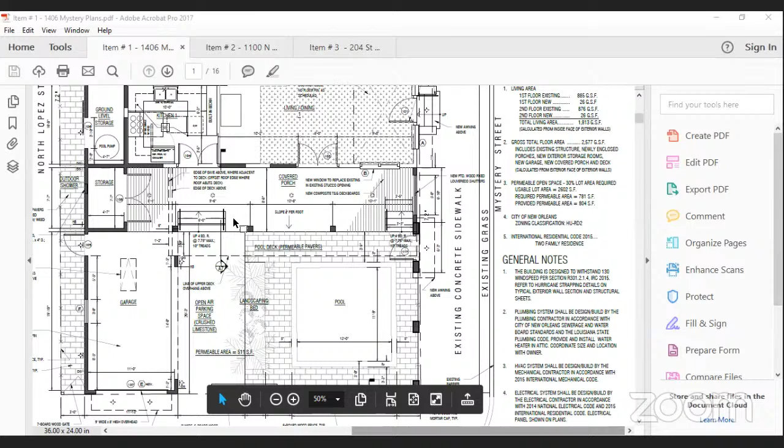Catherine, do you want to just take it away and let me know if you need a different page of this or a different spot? I'm on page 1. Okay, it's very simple, the drawings speak for themselves.

There's an awning over the garage door on Maurepas Street. And then there's an awning over the gate entry into the exterior space on Mystery Street, and also an awning over the front door, which is already there. There's already a stoop there, and we're adding an awning to match the other awning. So there's a total of 3 awnings onto public property. The stoops are already existing on Mystery Street, and one of them is just adding an awning over it.

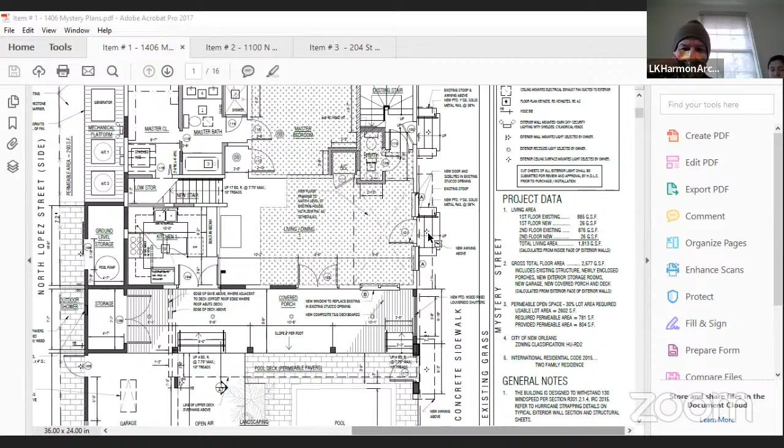You could see them in elevation, on page 2. Yes, on the next sheet. Okay, so one quick question that I had, and again I apologize, Ashley Givens isn't here and normally she'd be sort of on top of this, but with the holiday and people being in and out, I'm just trying to understand the dimensions of the awnings. Because they're different dimensions in terms of the distance from the property line, and that's shown here on page 2, right?

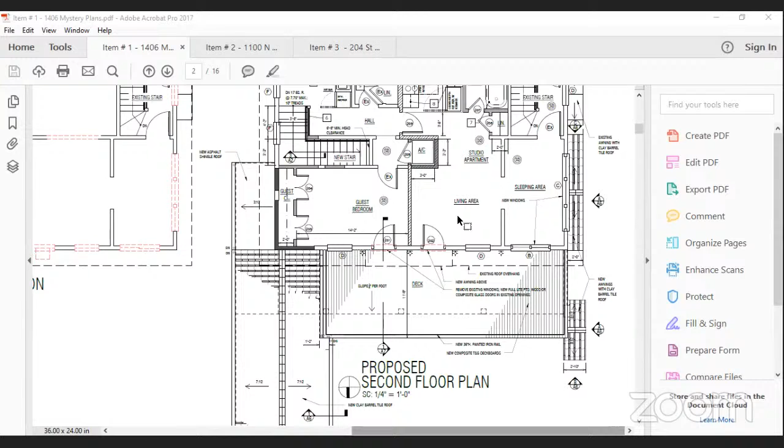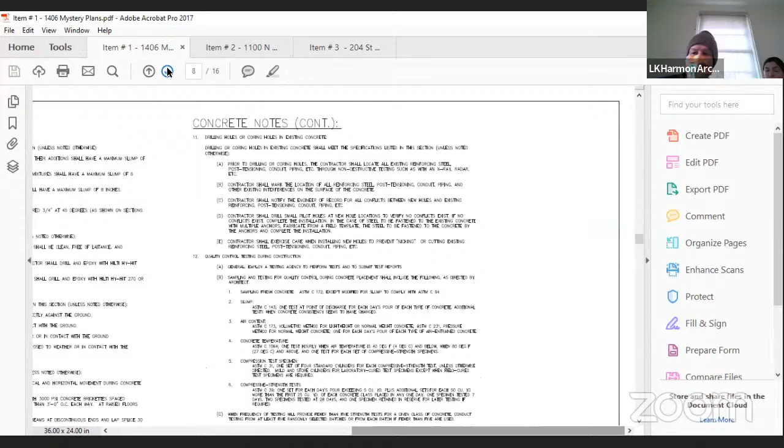Well, if you go to sheet A4, you can see the aesthetics of them better, but the dimensions would be on the roof plan and on the floor plans. But okay, that's the structural you're in right now. But we're going to tell you what the dimensions are, right here in the drawings.

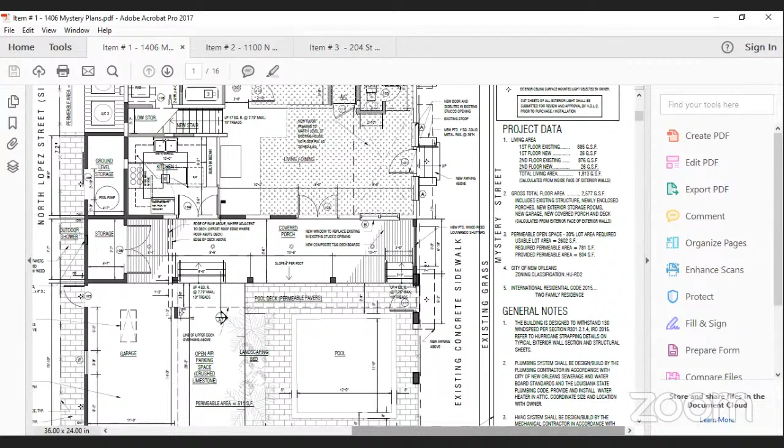It looked like one was, I guess there were 2 measurements on page 1. One of them is the one on the garage, which is facing Maurepas, is 2'2" by approximately 9 feet wide, and it's the terracotta tile. And then the 2 that are on Mystery Street, one of which is over a gate and one of which is over the front door. The one over the gate is 2'10" by approximately 6 feet wide, and it is also the terracotta tile.

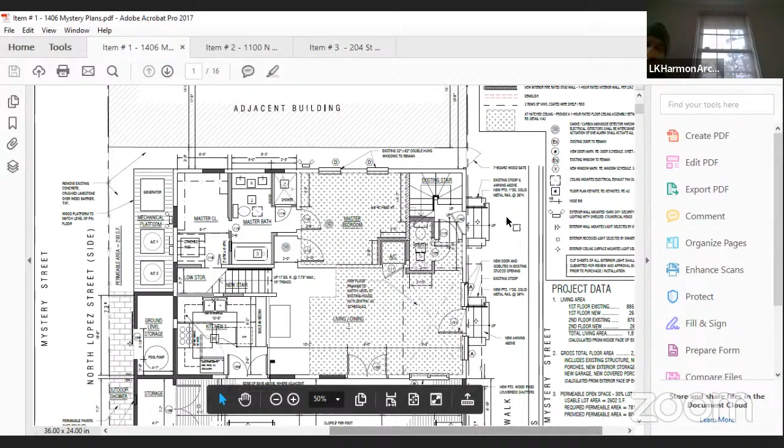And the one over the front door is, let's see, we're having to zoom in, excuse me, is 2'0" by approximately 12 feet wide. Okay, and then the other one is existing. There's an existing 4th awning that is over the other stoop closest to Esplanade Avenue.

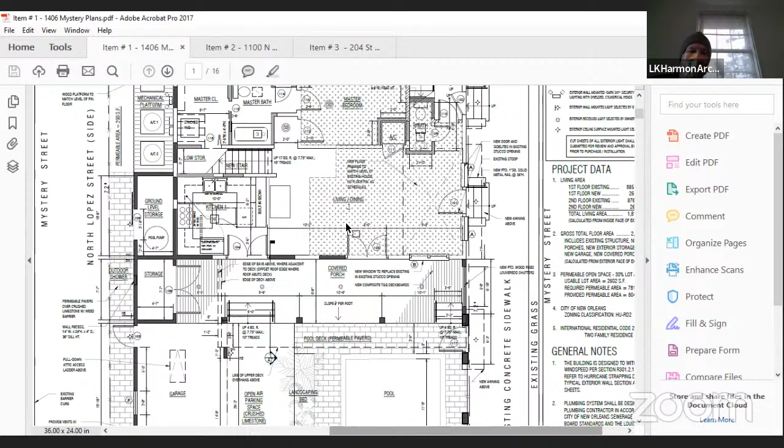Okay, so that's this one here that's shown as 2 feet. Can you see my mouse? Yes, the other one can. One, 2 feet 10. Yes.

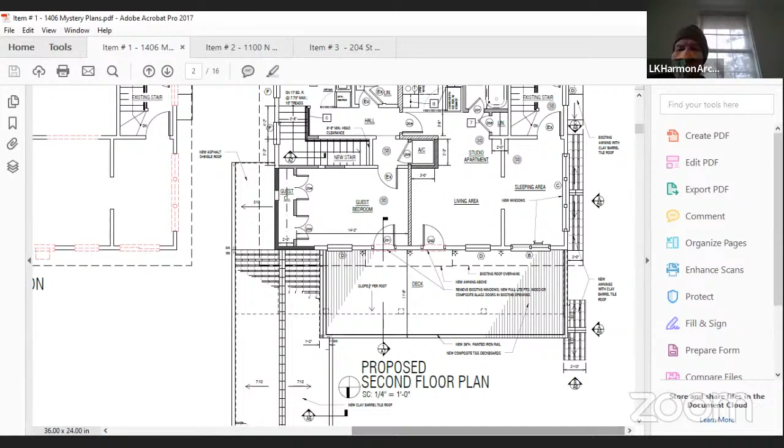And then the length of these is shown on page 1. Is that accurate? I don't know that we called out the dimension, but they're drawn to scale, so I was giving you approximate. There, one's 12 feet, one's 6 feet.

Okay, going forward it helps us a lot. From my department's perspective, we're concerned with the square footage, so we'll add those and have it to you today. That's all the questions that I had. Does anyone else have any questions or comments?

This is part of the Esplanade Historic District, so they have been to the commission and were granted conceptual approval. I believe we're waiting for final drawings at this time. Yeah, you've received the final drawings, y'all are reviewing them right now. HDLC is currently reviewing the final drawings now, for some weeks. Okay.

Just a quick question, mainly for Louis and Kai. I take it you're asking for the repair of the sidewalk and fixing the curb, is that correct? We weren't going to do that. No, we weren't. I'm sorry, the question was to DPW. Oh, I'm sorry.

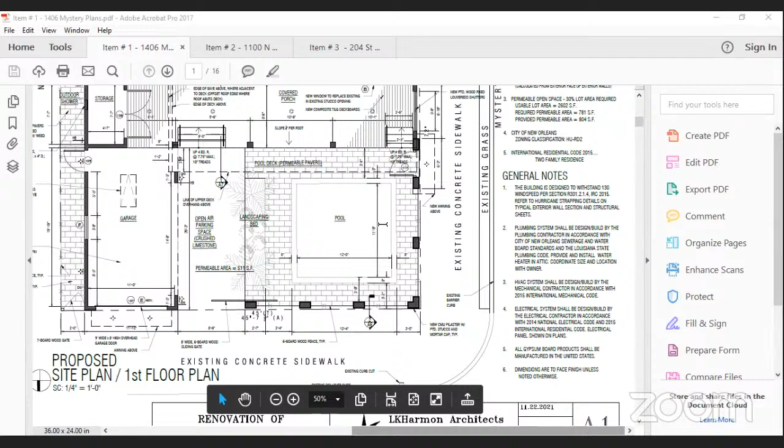That's correct. So there's 20 feet, so basically whatever's remaining from that parking space and the garage would be restored. It's not much, but you're also going to need to repair that sidewalk in front, basically all that sidewalk on Mystery Street needs to be brought to a state of good repair. That's just typical anytime you're doing this kind of work.

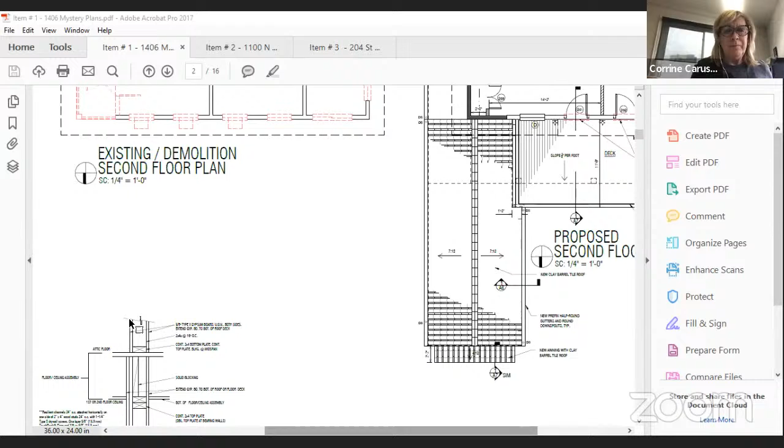That sidewalk is all cracked up, and we're only going to need a portion of the property for parking, so I think we kind of anticipated that we would be making it more presentable. Just make sure you take out the rest of that apron that you don't need, next to the pool, and restore that green space.

So you're talking about just the space between the sidewalk and the curb, is that correct? Yes, ma'am. Okay, then you're putting in the new curb. I'm going to assume that there's enough space - we'll have to check it out - for the reestablishment of the green space and then planting a tree.

I'm not sure how much space is there. There is approximately - I would say, yeah, it's about 12 or 13 feet, and the sidewalk would be 4 feet, 1 foot outside the property line. So I'd say about an 8 foot deep, 7'6" deep green space.

I can wait and see the plans and work with DPW, and when we have it all in front of us, it's a little easier to see and do.

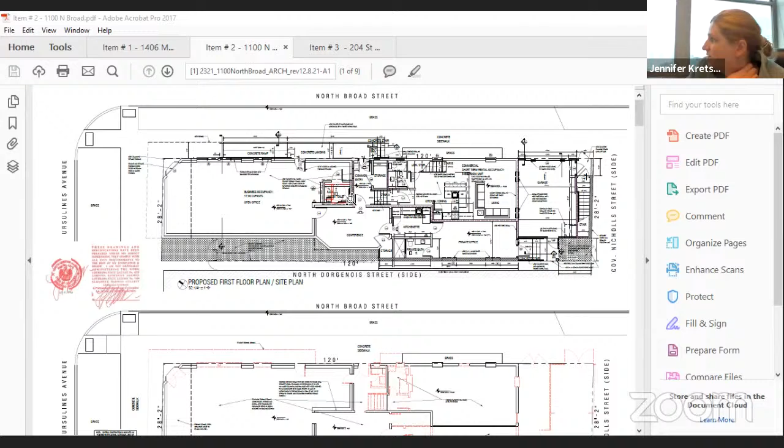Catherine, would you like to give us some background on these items? Yes, we are bringing the building up to code into a mixed use building, residential and commercial - a real estate office, one dwelling unit, one private office, and also a garage with another dwelling unit on top. Part of that involves ADA accessibility upgrades, which involves a ramp on the Broad Street side with associated railings and steps. I believe that's the only encroachment other than the awning.

The awning exists and it's a terracotta barrel tile awning right now, but we're replacing it with a more streamlined contemporary design, which you can see in the drawings on the elevation sheets further into the set. So basically the awning is above the door.

Whether or not the awning is included is going to be dependent on a determination from the HDLC, whether they consider it to be historic recreation of a historic encroachment, or if it's something new. We'll keep you in the loop as we make that inquiry.

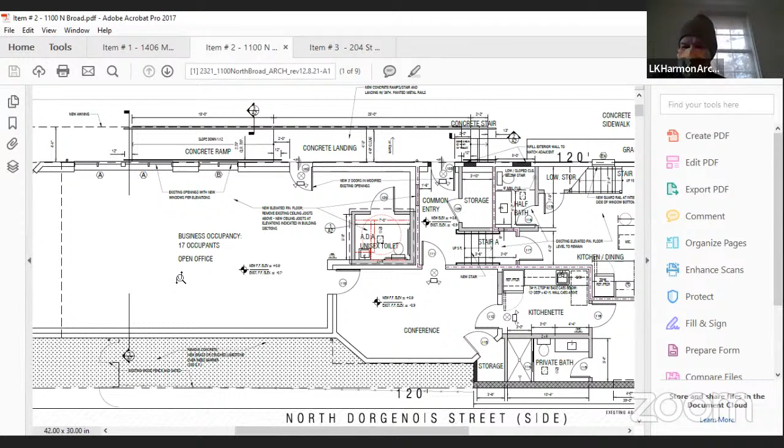Yeah, we're actually in the HDLC meeting right now simultaneously with this meeting, oddly enough. Oh my goodness, Tracy, I'm sorry. How did we do this with the timing? Well, that's an issue for another day.

Yeah, they're scheduled to go before the commission, which meets right now, so we'll have an answer as to whether or not the commission approved the work this afternoon. Okay, well, I was speaking about whether or not the awning is going to be considered historic or not.

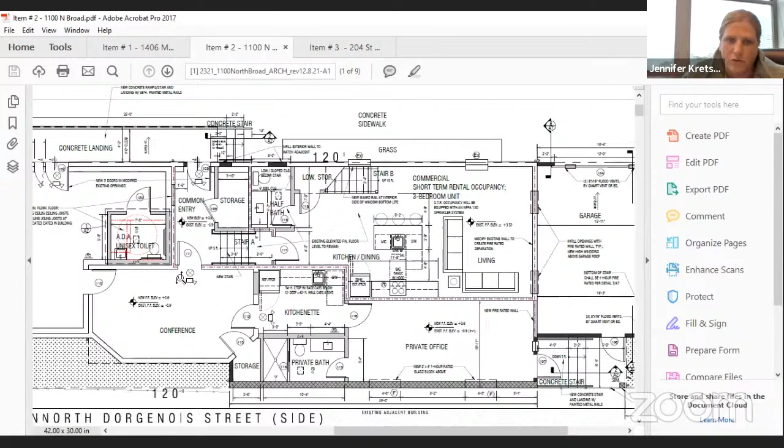That front awning, yeah, the side - the building as is considered historic, but it's going to be up to the commission to decide whether or not to allow everything to be done. Okay, alright.

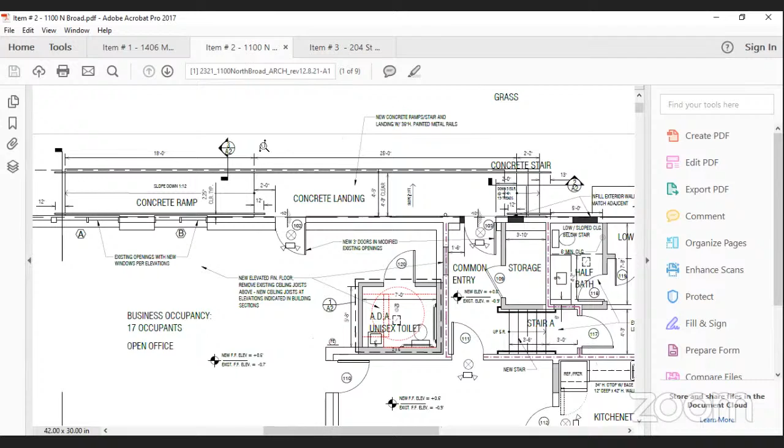In any case, the sidewalk would have to be widened toward the street a few feet to maintain, probably want about a 5 foot clearance from this ramp at least. So what's showing probably would produce, I'd ballpark about a 3 foot sidewalk or so. You probably need another 2 or 3 feet extended. Now you're not going to be able to do that without rebuilding the whole sidewalk. So that's what we'd be looking at, is removing the whole sidewalk and repouring something to get around the proposed ramp.

Okay, they need to go get a permit from DOTD, is that accurate? In order to perform the sidewalk work, the sidewalk work, any sidewalk work, is done under a project permit. The way DOTD likes to handle that is that you get a permit, or basically we at DPW would route the permit on the applicant's behalf. We would route that to DOTD and obtain that permit. There's no money involved, it's a free permit, but they like to have those sidewalk permits come from us. In terms of encroachments into their right of way, that's a whole different issue. I'm not exactly sure how they handle that in terms of building vertical structures. I don't know how they handle stoops really, so I don't know how they handle these ramps either.

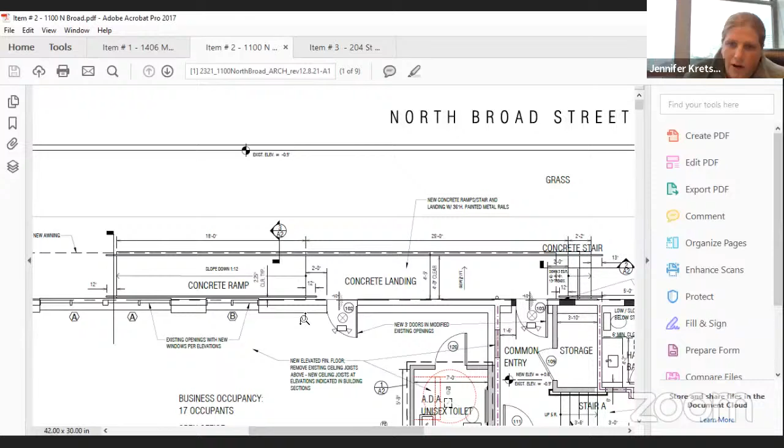No problem. Okay, and just on that portion, we'd like to request a street tree, a live oak. I think there should be enough room to plant it right around where your A2 is in the remaining green space, depending on where the jog in the sidewalk works out, if that is approved.

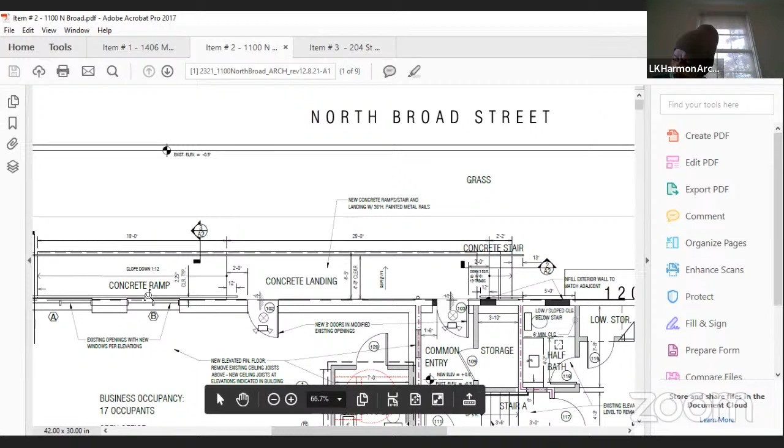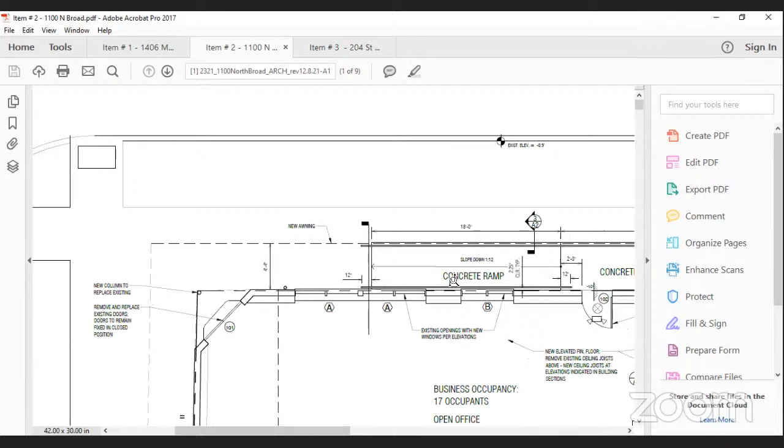So this is Sewage and Water Board. How far is the new awning that's going to be coming out from the property line? Four feet. Okay, and there's an existing awning right now. Correct, and it's also 4 feet. So what is this going to be, like a permanent frame with fabric?

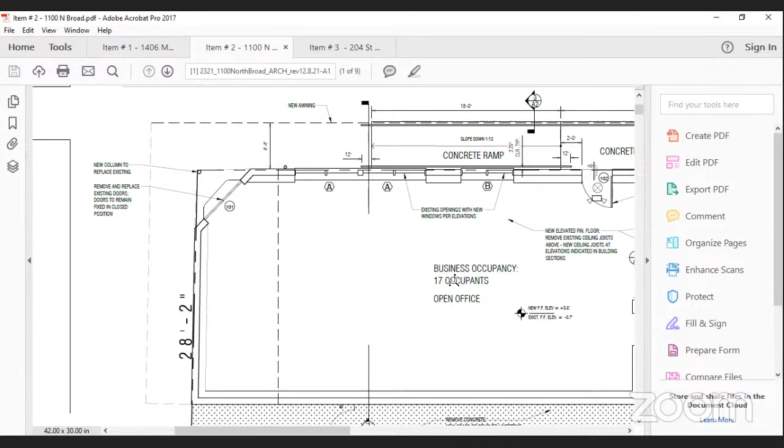No, it's going to be an architectural awning. It's structural, not just fabric. Okay, and that's not removable. No, it's not removable. The one that's there now is also permanent, structural wood frame, although it's in disrepair. So how far does the existing one come out? Four feet, same.

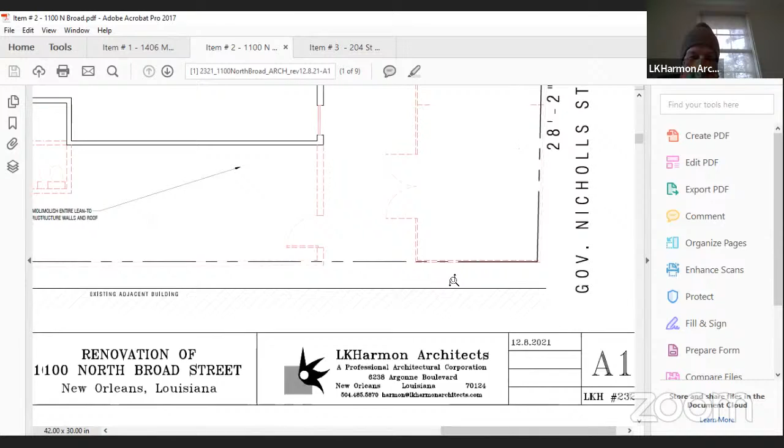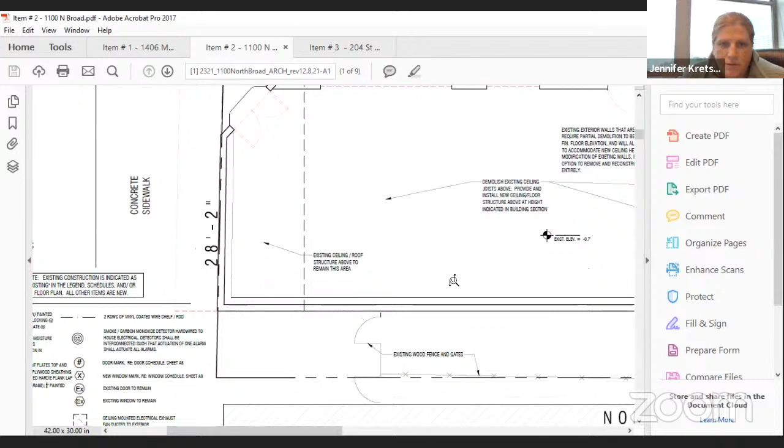You can look at sheet A1 of the drawings, in red dashed lines you can see where the existing one was. So you remove the existing awning, the note, and it L shapes around. So there's some frontage of the awning on Ursulines. Yes, just the old one and the new one both do that.

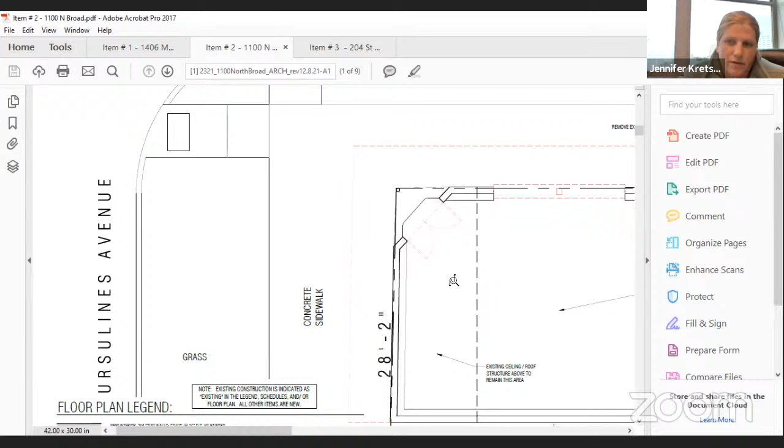Oh, well, that adds a layer of complexity. We would need an air rights agreement for the Ursulines portion if it's not determined to be a historic recreation by HDLC, but I guess we'll just stay tuned on that. Right, it'll probably be 4 o'clock this afternoon before we know. Okay, well in that case, we would be planning to follow up with you on the Ursulines side as needed, but I'm going to refer you to DOTD for the Broad Street side.

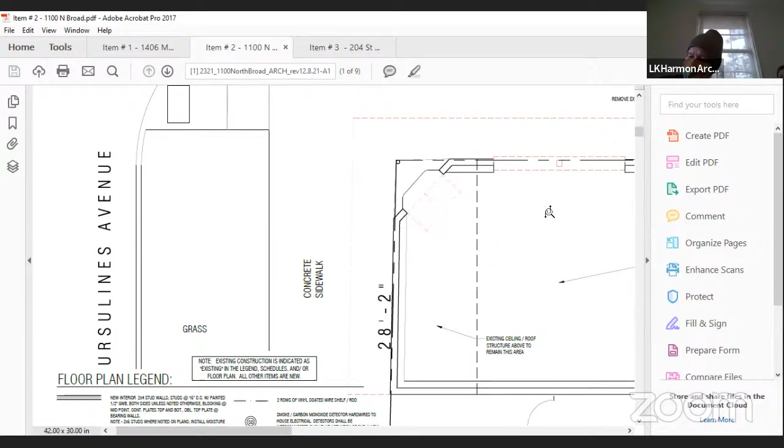Okay. Any other comments on item number 2?

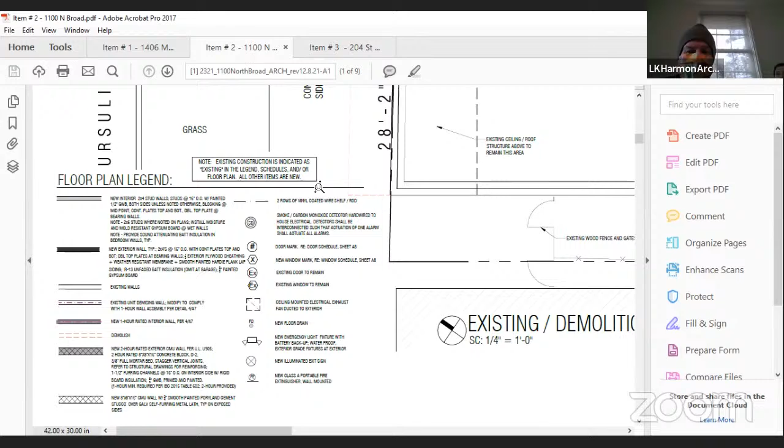So is the new awning, I guess the bottom, is it higher, or is it the same height? I guess the structural frame. It's going to be higher than the existing one. Okay, because the ramp ascends and it becomes non-functional. If it weren't to be higher, it becomes non-functional with the ramp and the stair, the new finished floor, because we're raising the entire finished floor inside the building.

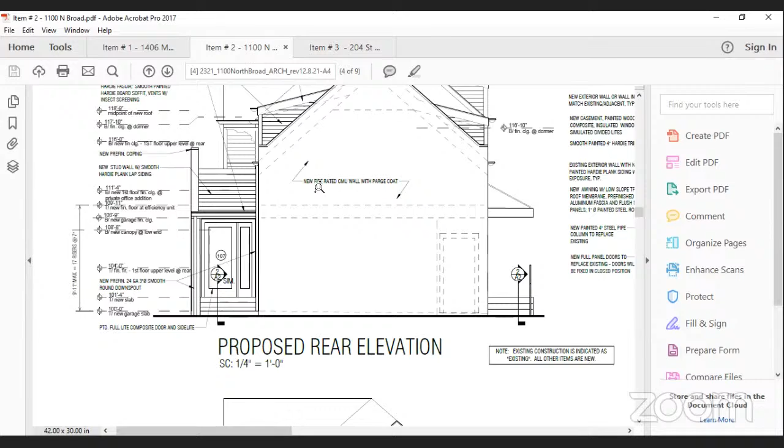And this one on page 4 would show that height. Is that 7'6" above the top of the landing? Yeah, right here. Yes, okay, it's 7'6" clear from the top of the stair landing and ramp landing to the bottom of the awning.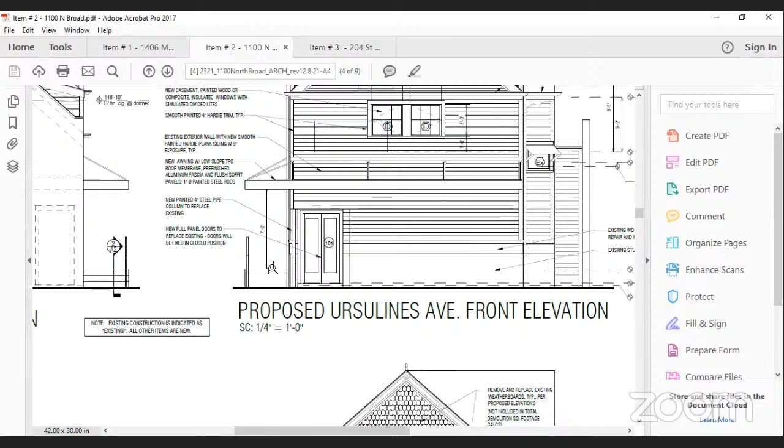Okay, so the ramp is just on the broad side, not on Ursulines, right? Correct. Okay, all right.

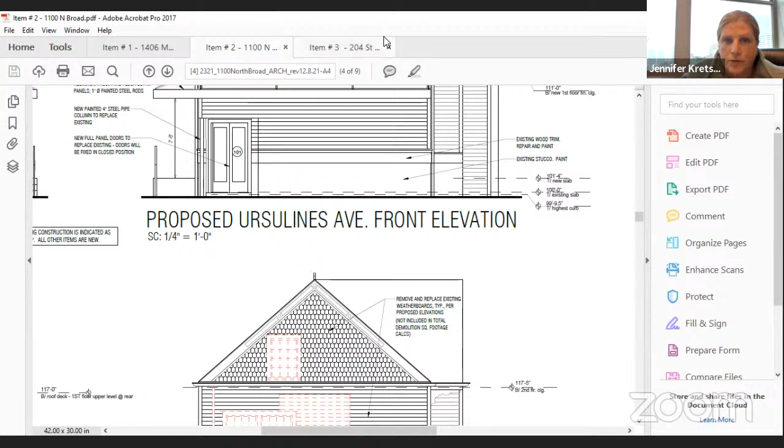Any other questions or comments on item number 2? Hearing none, I'm going to move to item number 3, which is the new hotel at 204 St. Charles Avenue.

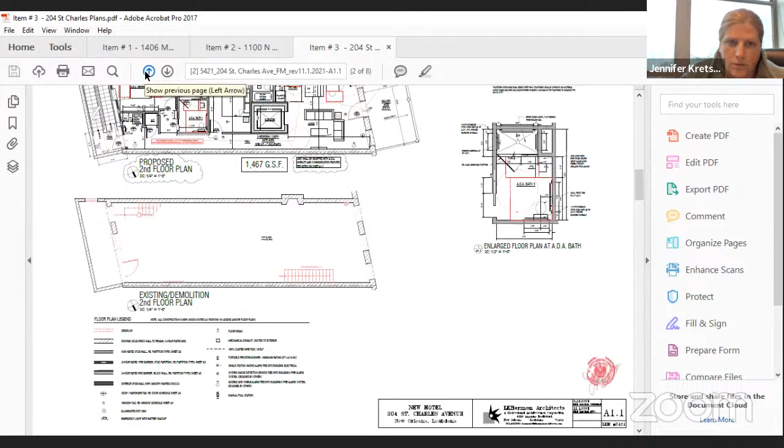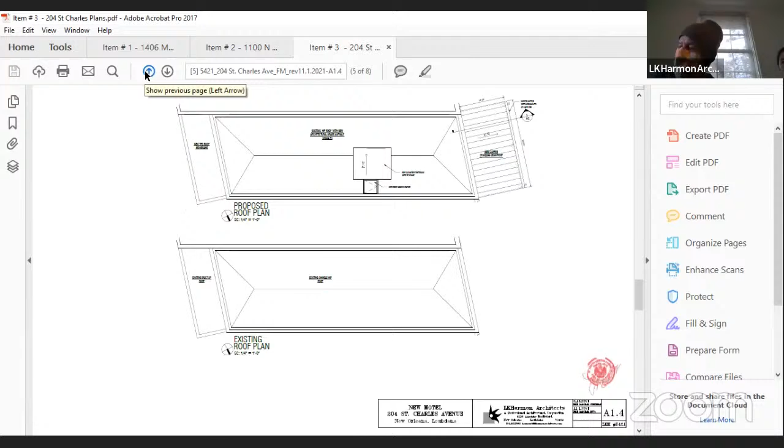I have to confess, Catherine, I was a little confused as to what was going on with this one. Is it a multiple story gallery? Yes, it is a gallery on all 4 stories of the building, as shown here on page 6. Is there a detail of the gallery footings?

Well, the structural engineer has been engaged, but we have not actually designed it yet. But what we've done in past projects of this nature on Canal Street, for instance, 2 of them I can remember recently, one is under construction now, is we're doing very narrow diameter round footings that go deeper than they would normally because of the proximity to the curb and underground utilities. Like a 12-inch diameter sonotube, reinforced concrete with a helical pile. That's probably what the engineer is going to end up going with. That's what our past 2 similar projects have done, which is helical piles and round, deep, cylindrical footings.

Thank you. I just wanted to make sure they weren't part of the packet and I wasn't showing them. I'm expecting DPW is going to say they need to see those before approval.

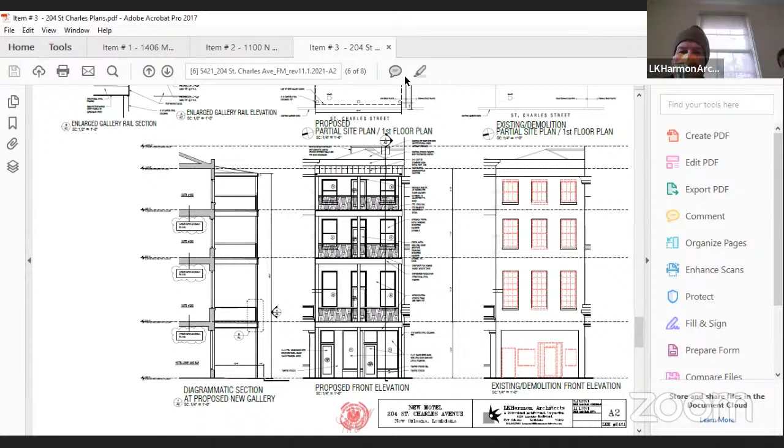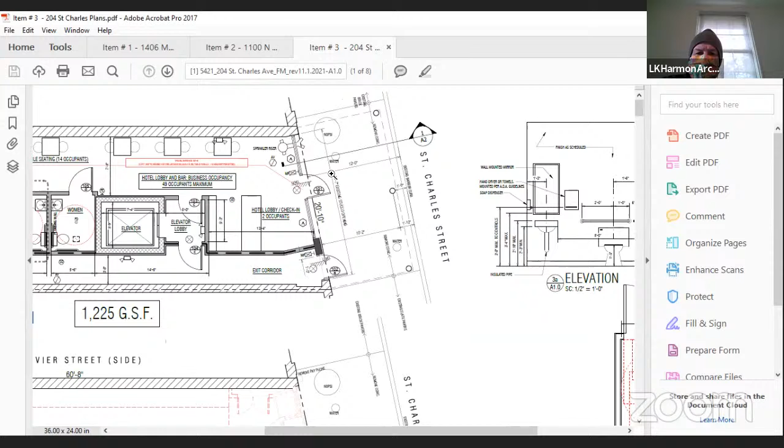Do you have some dimensions for the gallery? Yes, if you look at the floor plan, you will see that. And we would like to get one call out to the site, which we will do, to mark the utilities so we can be more aware of exactly where the underground water lines and sewer lines are, so as to be able to be 2 feet away from them. And if we have to move those gallery columns around, we will.

We tried to get that. Am I looking in the right spot here on the front door, on the front St. Charles fronting? Yes, you are. And the 3 round dark circles are the columns. You can see they're 1'6" back from the curb. But there are water lines and sewer lines underground there. We don't know exactly where. The maps aren't to the inch.

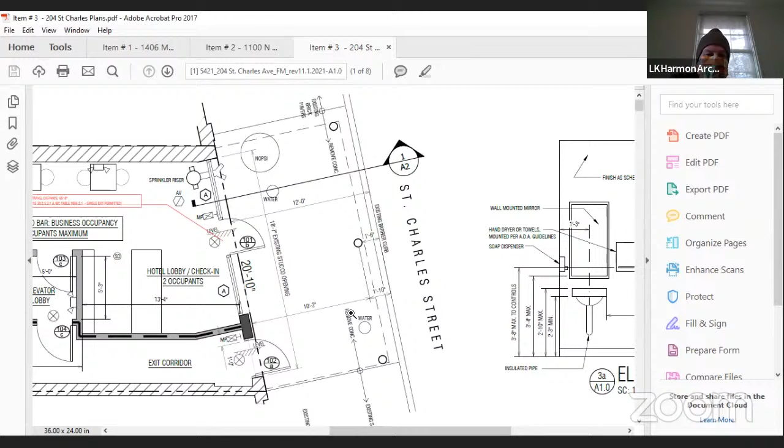And I've reached out to the Sewerage and Water Board department in charge of such things to no avail. I was hoping to have all this information. Do you have LaJoyce on the phone? LaJoyce, do you have any information on this one?

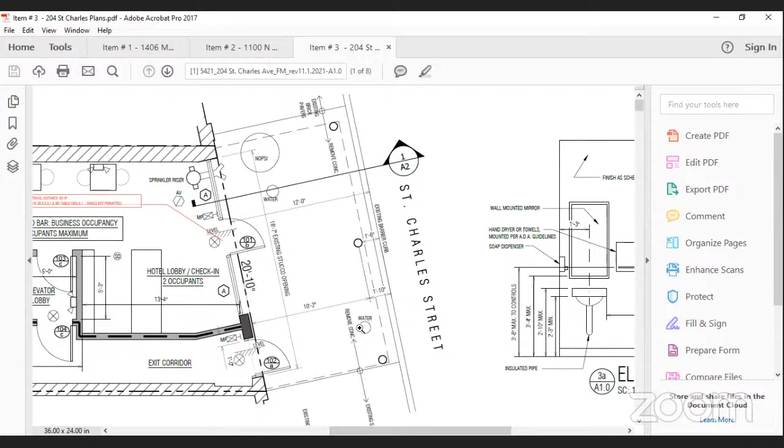No, you're saying water lines, is it the house connection? Or is it I think it's stormwater. I'm not sure. I don't know, I see you do have water, so that might be the meters they picked up. Well, I think what you're asking about is the storm drains, where are the storm drains? Oh okay, where's the drain line? Okay.

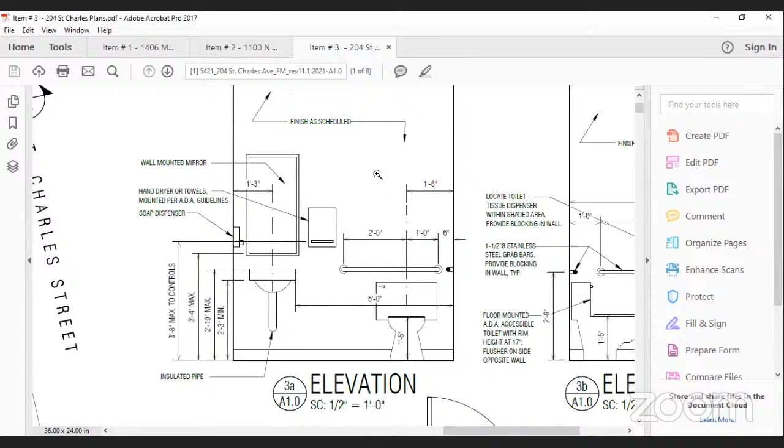And that's hard to say, I mean, they're always right around there, it's not gonna come up on a one call. But they're always gonna be right there around the curb, either in front or behind it. But I think you would know that by just looking at the drain manholes on the block. Okay, and they're basically right in front of the curb, so not behind the curb. Okay, so they're down in the street.

So it looks like, yes ma'am, we're not in the way. No, I think you should be okay. I mean, you have to do your one call for the private utilities and such. Yeah, I've reached out to a gentleman named Mike Evans at the Sewerage and Water Board to try to get more information, but I have not heard back.

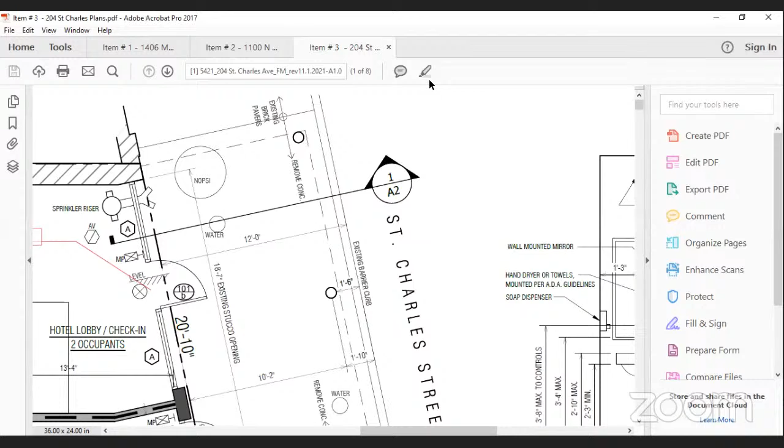At the, was that the house connection department? I'm not sure, I was just given the name of Mike Evans by the client's project manager.

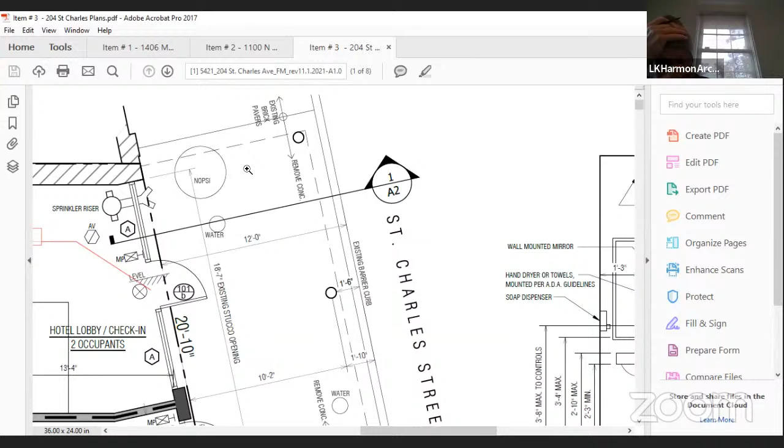Well, like Jennifer said, DPW requires a drawing of the footings stamped by a licensed structural engineer. We don't accept architect stamps for that, so I wouldn't try it. So we just need that. And then you're already showing, you're replacing your sidewalk with the DDD brick pattern, the brown and red brick pattern. I'm sure it's what you have in mind, right? To match.

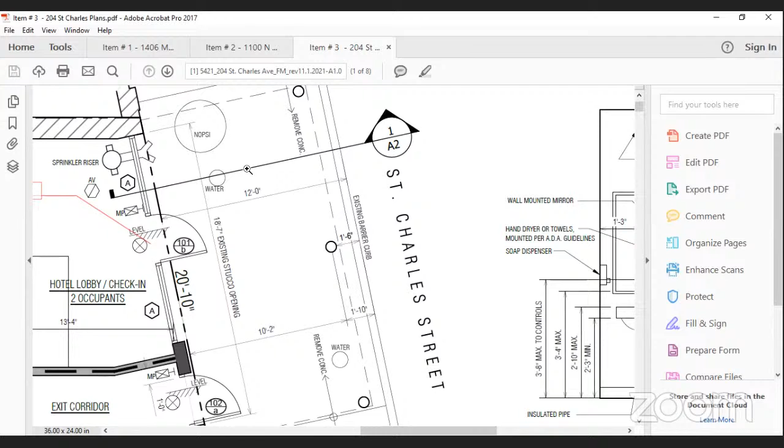Correct? I guess so. I'm not sure what was next to it. Yeah, it's more or less the pattern that's next to it. There was a brick pattern adjacent to it, we would just match that. Yep, okay.

Okay, so Catherine, can't remember off the top of my head who the applicant is here. I just want to draw your attention to the change in the law governing encroachments that took place in October. That means if a servitude and lease agreement is entered into with the city, we are going to be following up requesting an annual inspection of the gallery, and to have that inspection report submitted to real estate and DPW on an annual basis for all new restrictive encroachments. I know that's somewhat burdensome, but there is a safety element, and I just want the applicant to be aware that obligation is being added to our existing template for this type of encroachment.

Okay, it will happen. We are the applicants, so. Okay.

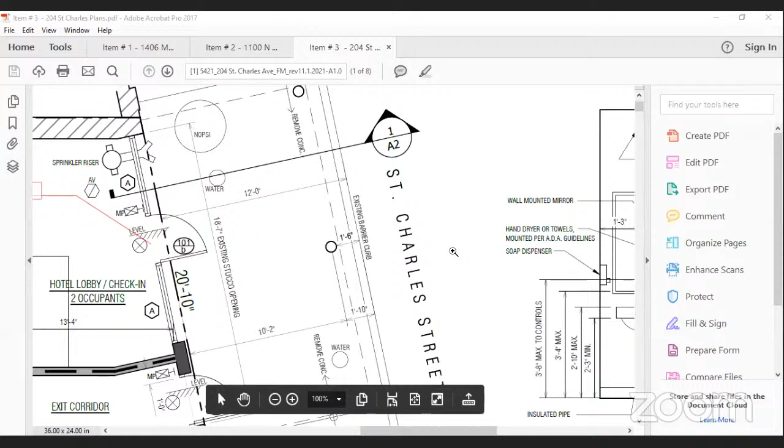Does anybody else have any comments on item number 3? For the house connection, you can call the department at 585-2164. I'm not sure if y'all know where the house connections are, but that might be what was picked up in the survey, because I'm showing that the sewer and the water is in the street. It's on St. Charles, right? Yes, on St. Charles in the CBD, 200 block.

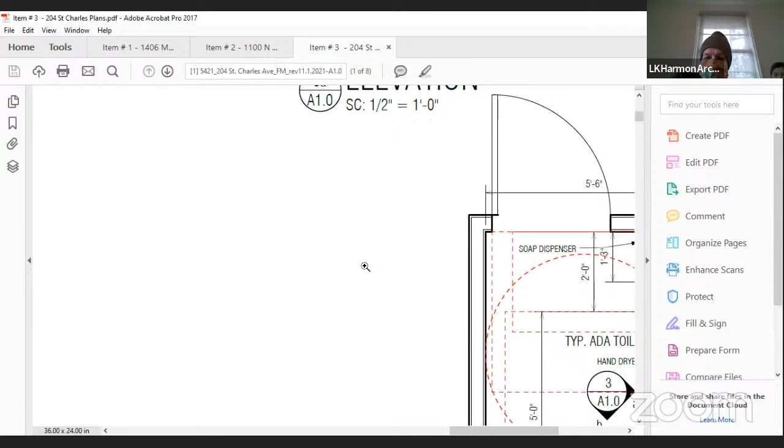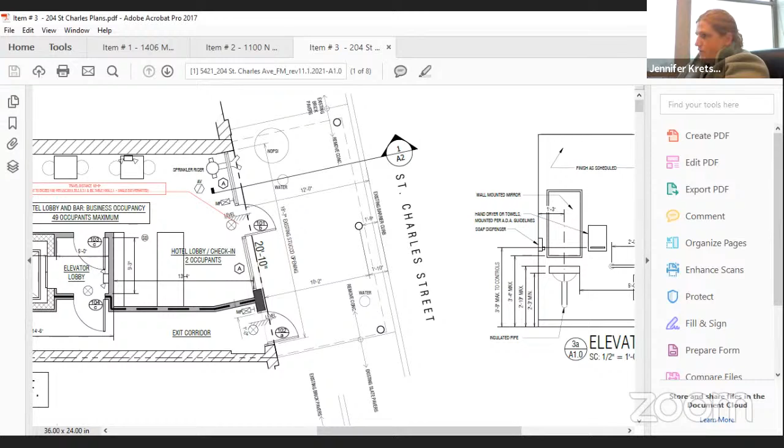Any other comments? Okay, hearing none, I'm gonna quickly go to our fourth item on the agenda, which I think was the election of chair and co-chair. We'll also be taking a 2-minute recess to review if we've had any public comment.

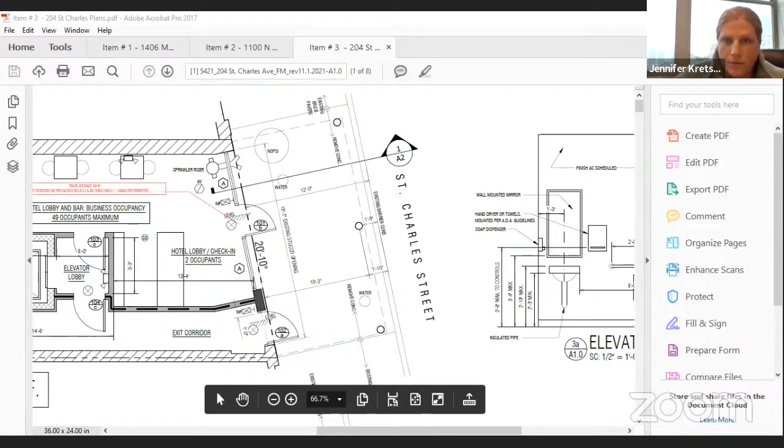Would anyone like to make a nomination for chair? Hi, this is Eva, I'll nominate you, Jen. I'm not sure we can nominate ourselves, but thank you, Ava. Oh, okay, well sorry, I'll nominate you then. I didn't hear Ava, so I'm going to go with, I nominate Jen. Second, thank you, Tika and Lewis. Would anyone else like to throw their hat in? I doubt it. By acclamation.

Okay, sounds good, should we actually take a vote? Again, guys, I'm only going through this because the ordinance said that we had to do it in January. The nomination's been made by Tika, seconded by Lewis. HDLC, aye. Parks and Parkways, aye. DPW, aye. Sewerage and Water Board, aye. Safety and Permits. Jen, this is VCC, I'm back on the call. Sorry. That's all right, VCC, aye. All right, so Safety and Permits, aye. And do we still have NORD? I think he jumped off. Okay, so